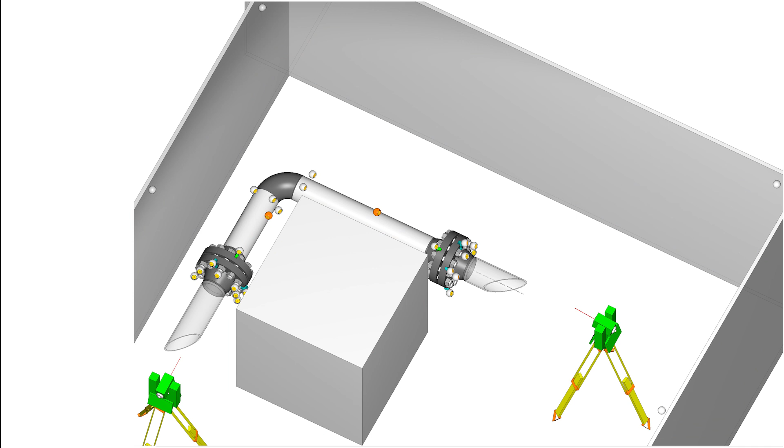It is not always possible to capture all the required data points for a spool from one location. Large spools can be a challenge, or the spool may be in situ where various components block your line of sight. In this video, we will show you how to move the instrument mid-survey so that you can make sure you get good coverage for your flanges and capture all the necessary data points for a reliable report.

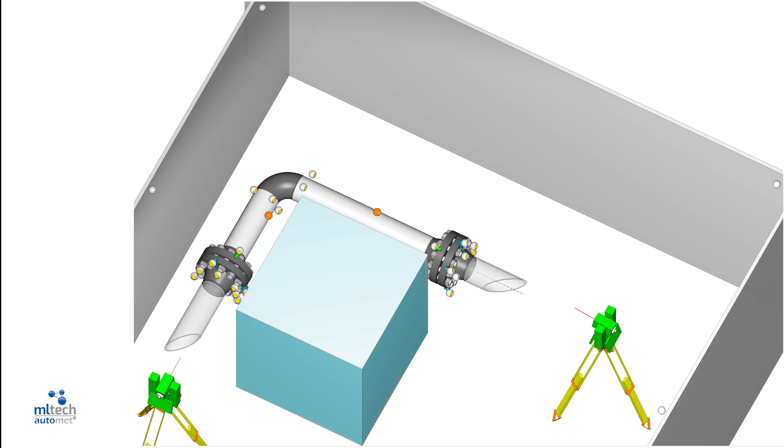In this case, we are moving the instrument because an obstruction prevents us from being able to observe both flanges on the spool from the same location. Before we start our survey, we need to set up control points. These control points allow you to create a reference system that can be referred to after a move. You need stable locations surrounding the item being surveyed.

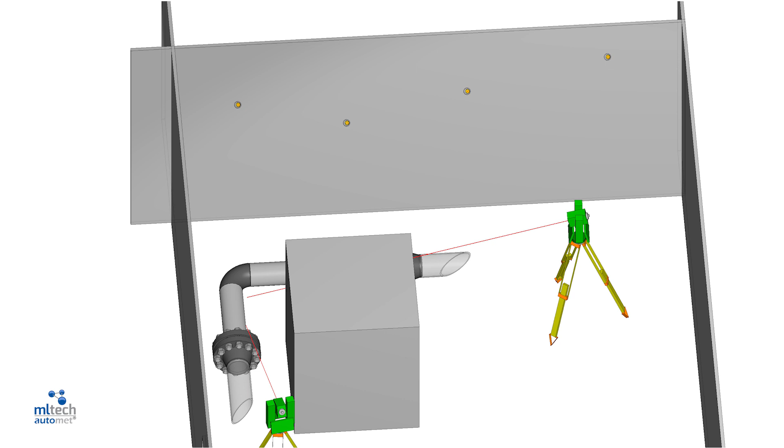You can place the large round magnets found in your device set in magnetic locations and draw a circle around them so you know if they have moved. Do not put all your control points on a straight line. Try to create an imaginary 3D box around the item you're surveying. Here the control point shape improves as we move the points because we are covering more area around the spool. And here the control point scale improves because we are increasing the scale to match the spool.

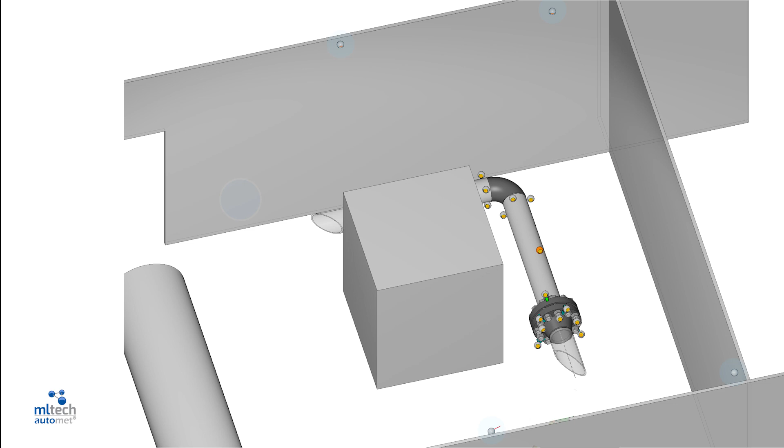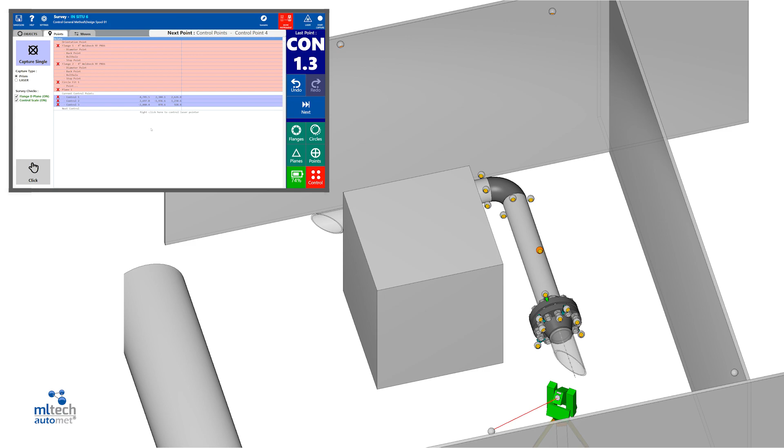Stand at each setup location and make sure you can see at least 4 control points and the flange detail points. Once you're satisfied this has been set up correctly, you can start your survey. Press the control button. Capture the control points. The order is not important. When the control point criteria have been met, the control and move buttons will turn green. If the buttons turn yellow, it means the control could be better. A move is possible, but try to reorganize the control points to get the buttons to turn green.

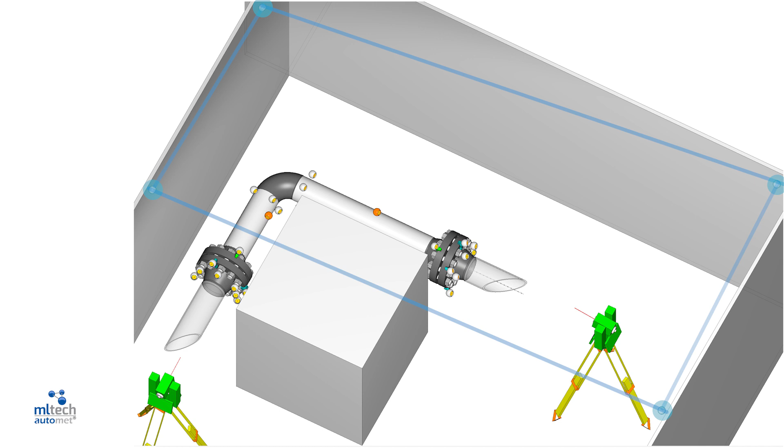There must be 4 or more control points. The pipe and control must be of similar scale, and the control must have good shape. Then observe all the data points you can from your first setup. In this example, we can only see 1 flange and 2 circle fits. Press the Move Instrument button. If you press this button and there aren't enough control points in the file, you'll be informed, and you'll need to take more control points.

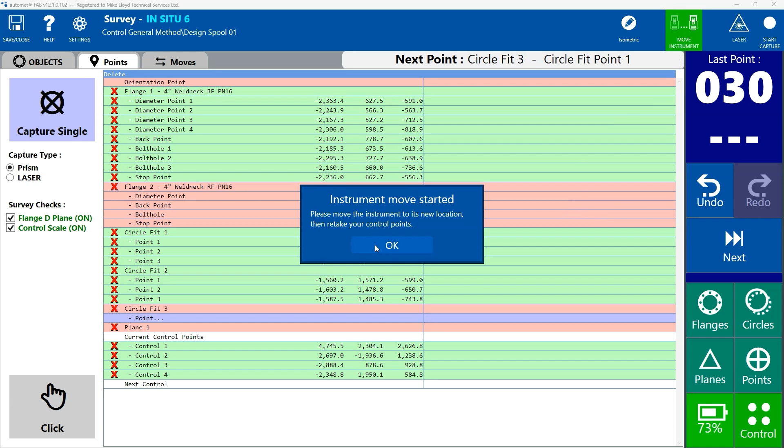Now, at the second setup location, make sure you can see the control points and the objects being measured. The software border turns red, and most buttons are deactivated. The only exception is undo. If the instrument has not yet been moved, you can undo the move command, if the move is not necessary. The measurement buttons are not yet active. The control must first be measured to ensure that the control point criteria have been met.

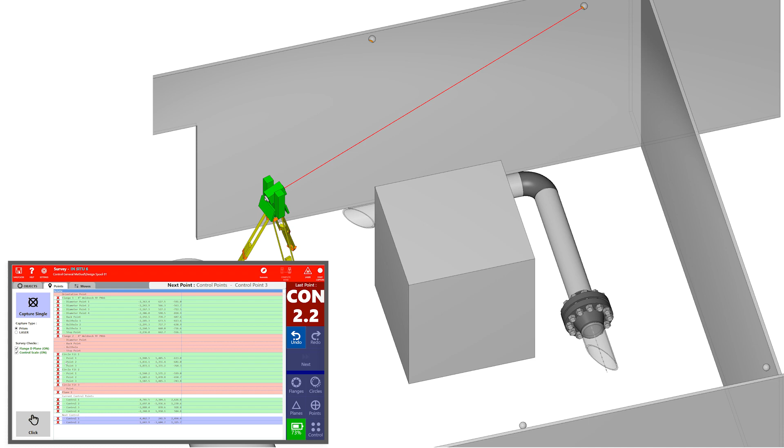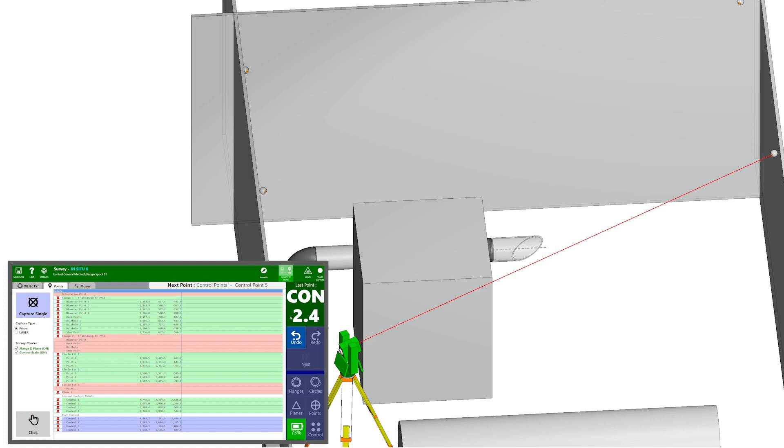Again, there must be at least 4 control points. The pipe and control must be of similar scale. The control must have good shape, and how the first set of control points fit to the second set must be reasonable. Again, the order in which control points are captured is not important. When the border turns green or yellow, you can proceed. When the Complete Move button flashes, the control criteria have been met. Press the Move button to complete the move and update the registration. The system will now display the moves report.

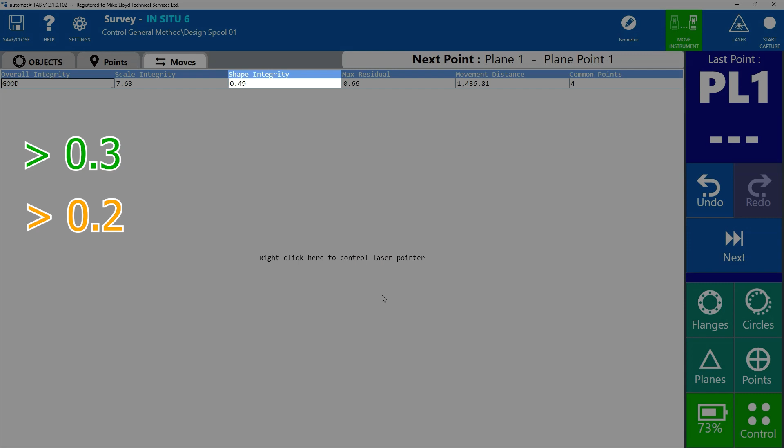Overall integrity can be rated as good or fair, with green representing good and yellow representing fair. A scale integrity greater than 1.3 indicates that the control scale is roughly equal to the pipe spool in the design file scale. When shape integrity is yellow, it is greater than 0.2, which corresponds to 1 control point approximately 200 mm off a 1000 mm long line. Green is above 0.3. The maximum residual in millimeters is the largest error in the fit when the 2 sets of control points are aligned using the least squares method.

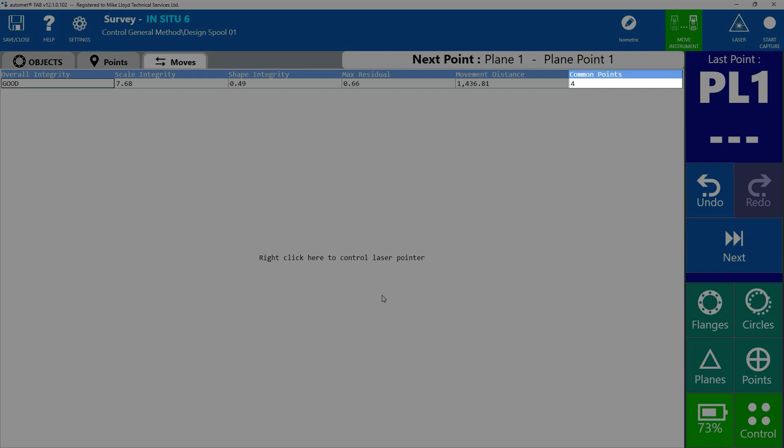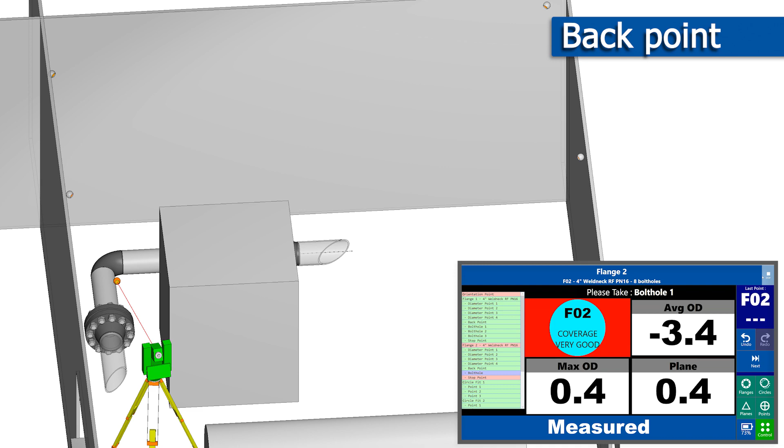The movement distance in millimeters indicates how far you have moved between instrument setups. Common points indicate how many control points were used in the fit. All survey points are now in the same coordinate system, allowing you to continue your survey. This is a live registration method that includes real-time fit, scale, and shape checks.

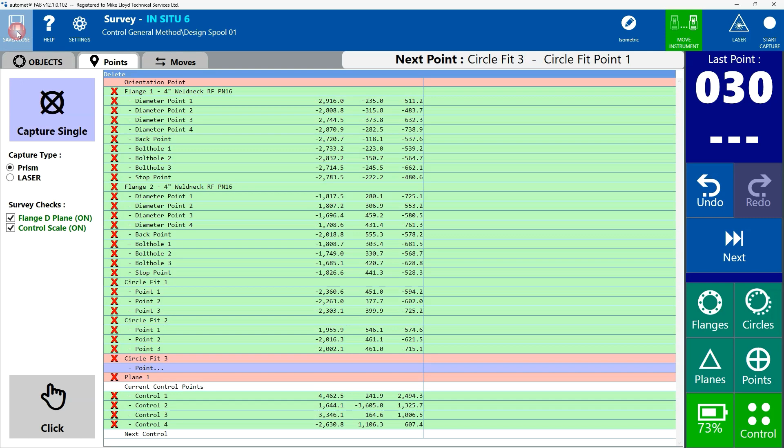Live registration means there is no post-processing of multiple setups, and the live flange diameter and PCD checks are updated with all observational data as you take more measurements on a flange common to both setups. There is no practical limit to the number of control points or setups. The control from both setups has been averaged, and only one list of 4 control points remains from the 2 we captured.